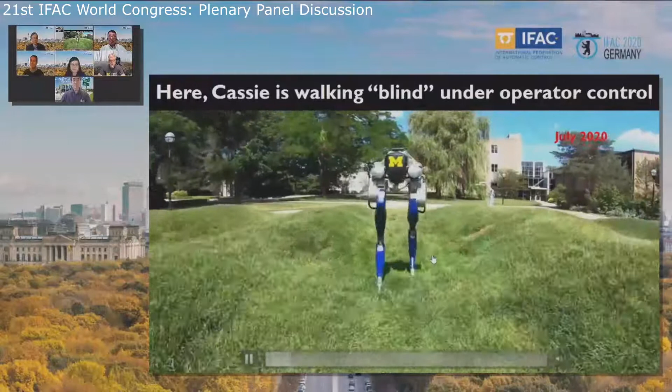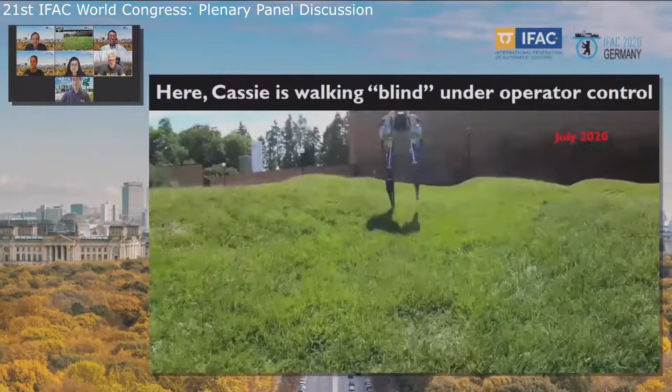So this is a Cassie bipedal robot. You will see here it's under operator control. There is no perception on the robot other than an IMU and encoders. There are no force sensors in the feet or anything like that. This is the wave field at the University of Michigan, right behind the aerospace building.

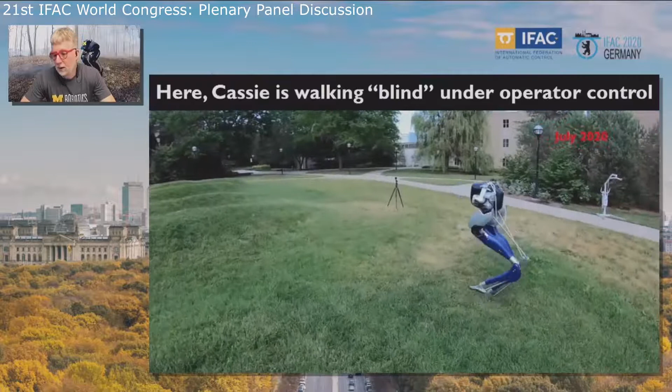It's been a dream of mine to do this, and one of the big painful parts of my life is watching children just run across this thing carefree, and my robots being a total disaster on it until 2 weeks ago. One of my students pulled off this. What I want you to see is some of the things that a robot is capable of doing when it's under operator control, and what we want to be able to do is accomplish this under autonomous operation, and I'll be talking about that next.

But notice here he's approaching it somewhat cautiously. This is the first time through these big humps. We've been up and down the valleys with other robots before, but we've never had a robot able to clear these humps. It's a single gait. The robot is not changing gaits as it moves. What the operator is doing is just controlling the speed that the robot is advancing, direction, but of course all of the real-time balance is being done by the robot.

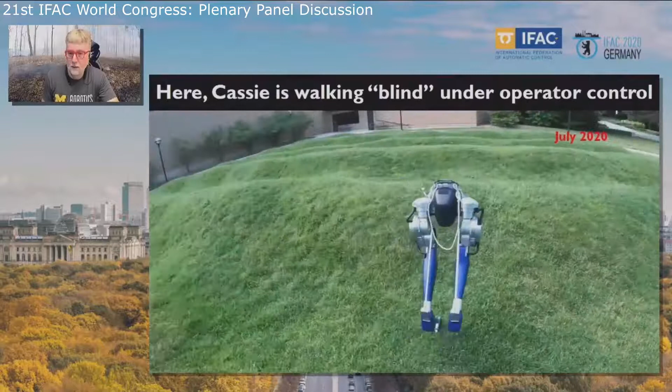So we make it through the humps, and then we get to the very end. And one of the things that my lab is extremely well known for is we're brutally honest with where we are in the state of the art. And well, yes, face plants. That's our state of the art.

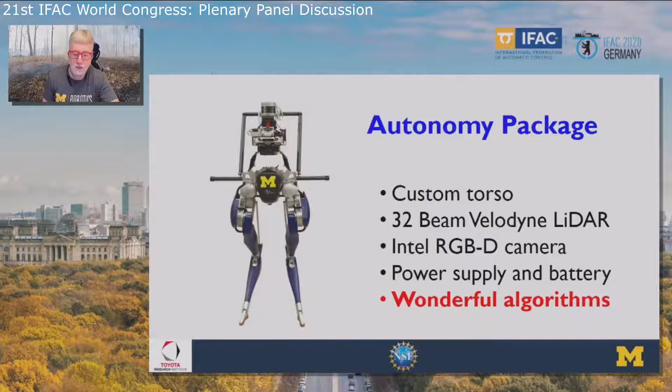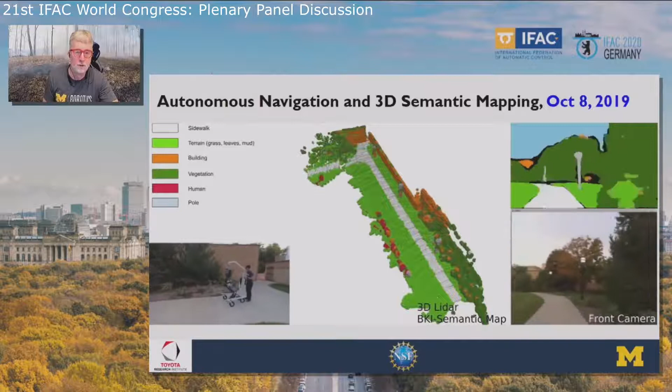So now this is our Cassie robot when we equip it with an autonomy package. So we have an RGBD camera, where D means depth, and a LiDAR. And so this is also on the wave field, but navigating around it on the sidewalk. This was last fall. And what I want to do on the next few slides is just walk you through what's actually going on in terms of building this real-time map that a planner is able to use to develop waypoints that are then sent to the local controller that you saw just performing on the wave field.

So what happens is when the camera image comes in, it is being segmented with a neural network, and then semantic labels applied. So what this means is the robot can reason about the scene because it knows what is a sidewalk, it knows what is grass, it knows what is people, it knows pixels that are assigned sky, building, and grass. The next thing we do is we become extremely proficient at fusing LiDAR and camera data. So what you see here is LiDAR data on the right overlaid on a camera image.

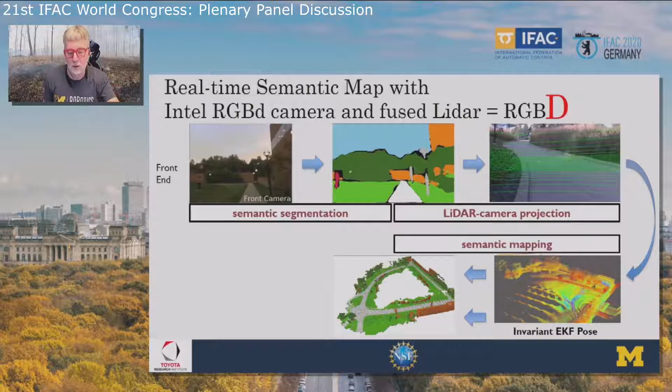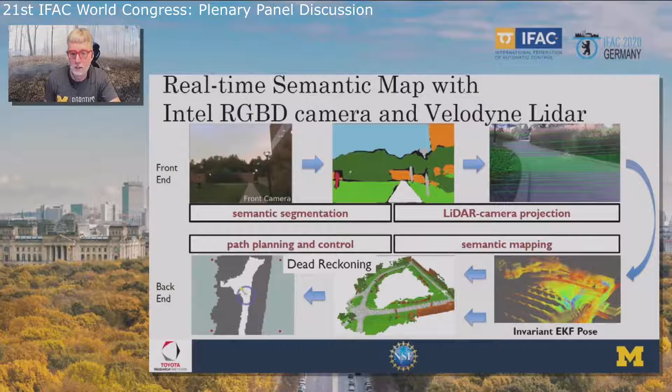And then when you really get this right, and then you take multiple LiDAR frames and fuse them together with an invariant extended Kalman filter, which is processing the IMU data, you get this beautiful map that you see on the lower right. And then that leads to us being able to build in real time the map that you see in the lower middle of the screen. Now that map looks like simultaneous localization and mapping is happening because it looks like a loop closure has been done, but after 120 meters of walking, the robot misses the final target point using dead reckoning by a mere 10 centimeters. That's 1 part in 1,000.

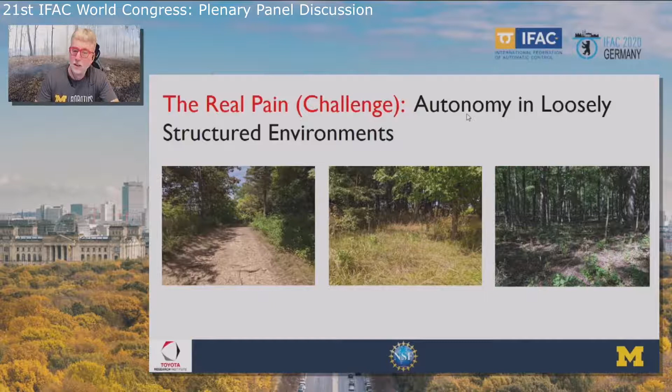Now to accomplish this takes an amazing amount of system integration, which is extremely hard, but my group has built that up. The next joy that we're going to have is when we can do this level of autonomy in much more loosely structured environments where we are heading to the forest. Right now, in terms of Jing Sun's theme, it's painful just thinking about how we're going to accomplish this.

And now, Ilya, take it away. Thank you very much, Jessy.

So it's my pleasure to contribute to this discussion of exploring dynamics of integrated systems by making a few remarks about flexible aircraft. And one of the recent trends in commercial aviation has been towards airplanes with high aspect ratio wings, basically longer wings. Such wings reduce fuel consumption, but they are also more flexible and can experience high deflections and loads as they're exposed to maneuvers and gust disturbances. So for such a flexible aircraft, it is more challenging to ensure that critical loads do not exceed specified limits, which are imposed to guarantee aircraft safety and structural integrity.

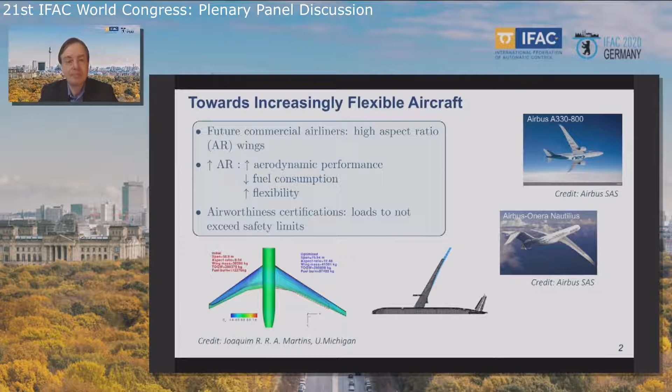At the more extreme end of flexible aircraft are very flexible aircraft, or VFA. They include high-altitude, long-endurance platforms, such as Aurora Odysseus and Airbus Zephyr. These vehicles are solar-powered and can stay up in the air for days to provide observation and communication relay services. As you can tell from these pictures, these aircraft rely on high aspect ratio wings, high lift-to-drag ratio, low structural weight, multiple propulsors, and multiple aerodynamic control surfaces for their mission.

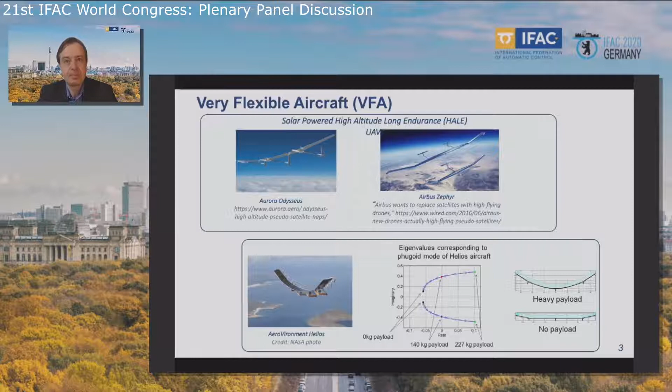So these flexible aircraft are quite challenging to control due to reduced separation between rigid body and flexible modes and possibility of large deformations and nonlinear behavior. Typical physics-based models for such vehicles are high order, between 100 and 1,000 states, and it is not straightforward to directly use them for control. There are multiple control effectors, which can, in extreme wing deflection cases, even change their role. For example, an aileron can start acting as a rudder.

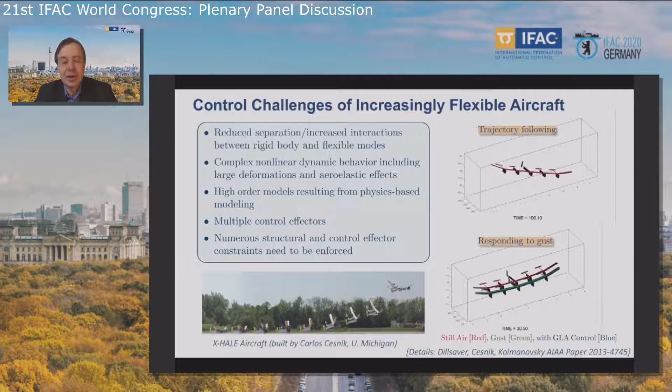There are also numerous structural and control effector constraints which need to be enforced during aircraft maneuvers or when responding to gust disturbances. Some of these challenges are exemplified in an aircraft called X-HALE, which was built by my colleague at the University of Michigan, Professor Carlos Cesnik. If you attempt to pilot such an aircraft remotely, that is largely open loop, you very quickly come to understand the challenges or pain in dealing with its dynamics.

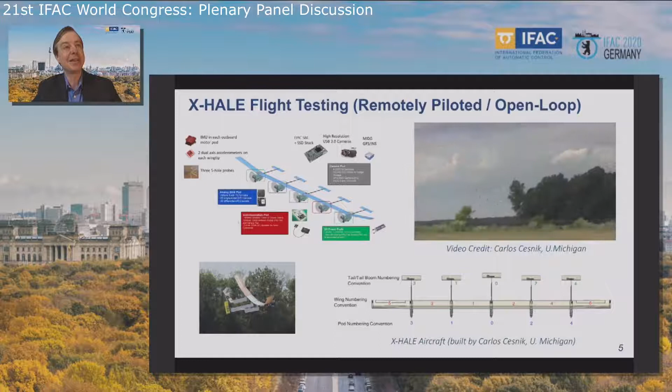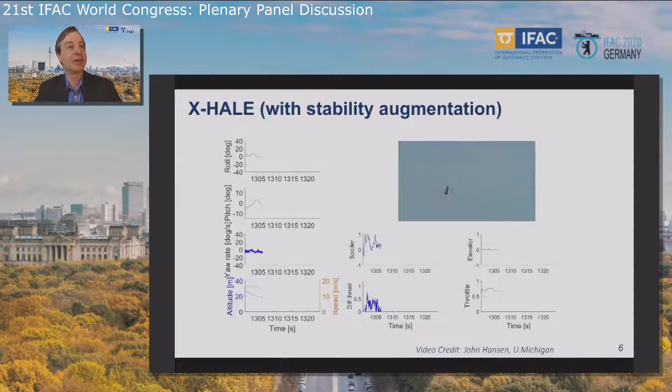This video illustrates some of the early flight tests and shows some of the interesting dynamics of this aircraft, as hopefully you can see from this video. And ultimately, an attempt to control these dynamics is unsuccessful, ending in a crash landing that we will hopefully see here on the video shortly. So you can have a lot of fun trying to control such an aircraft. Of course, the results can be improved with some level of control on board, and this video shows a more controlled flight and successful landing of such an aircraft.

Carlos and I have been collaborating on trajectory following, maneuver load alleviation, and gust load alleviation problems for such and similar aircraft. In fact, in our current work with Carlos, our PhD student Matias Pereira, and Dr. Fabio Vetrano from Airbus, we've been developing a maneuver load alleviation system for flexible aircraft, which we call MLA Governor. This MLA Governor is based on model predictive control, and its advantage is it can respond to predicted load constraint violations at multiple points on the aircraft, rather than react to already occurred threshold violations as existing MLA schemes do.

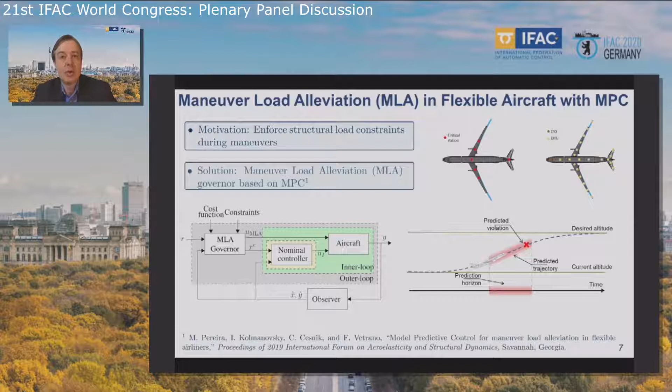The way MLA Governor alleviates loads is by modifying reference commands, such as the flight path angle that you feed to the nominal flight controller, and by directly modifying operation of the control surfaces dedicated to MLA, such as outer ailerons. And with this, it's my pleasure to invite Professor Kira Barton to continue the discussion.

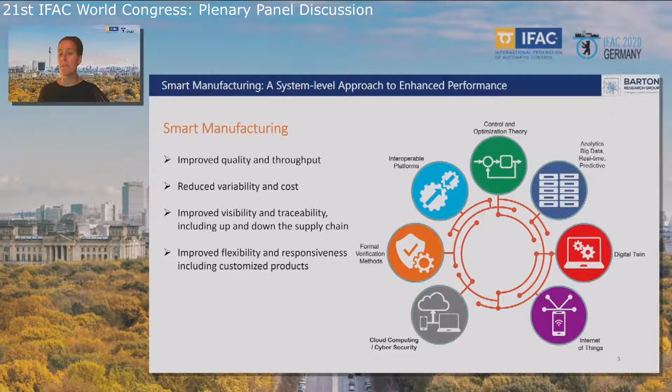But what I would like to talk to you a little bit about today, very briefly, is the area of manufacturing. And in my group, what we focus on is really modeling and control in manufacturing and robotics. And particularly, we've been looking into the ideas of smart manufacturing and how to think about using a variety of different technologies and capabilities so that we can try to improve performance and think about being more agile and responsive. And this is particularly true as we can see examples in the most recent several months where the ability to respond and adapt to changes and modifications is extremely important.

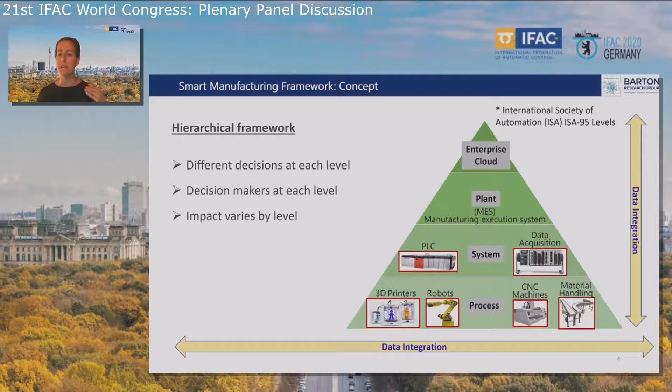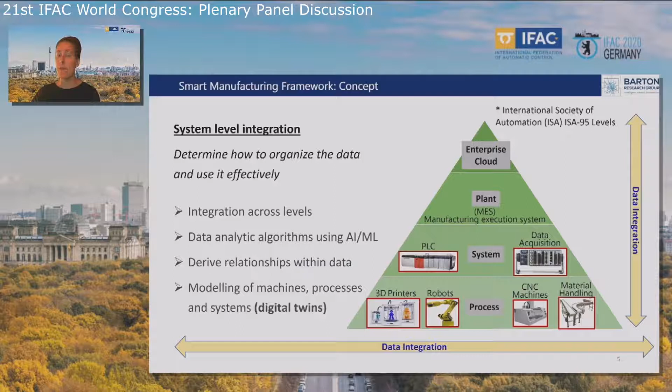Now with manufacturing, manufacturing is naturally a very hierarchical system. And so we have dynamics and interactions and really decisions that have to be made at every level. And so one of the big challenges that we see is how do we effectively transfer information and understand the interactions across these different levels. We look at this as a system level type of problem or challenge really, where what we want to do is to be able to effectively take decisions and information and knowledge, and we want to integrate it across the different levels. And when we start to do that, we have lots of different system integration things that we need to think about, and we have interactions that we need to consider from multiple different planes.

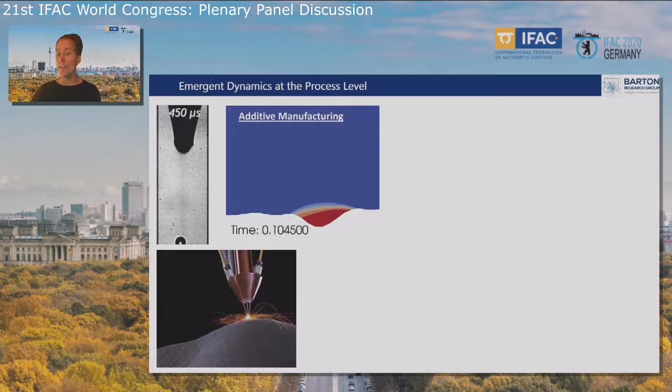So let's consider from the process standpoint, there are interesting dynamics that we can share just really from a process side. So if you look at an example like additive manufacturing, this is a really nice emergent area that has lots of different dynamics that come into play, particularly when you start to look at the interactions that you have between the surfaces perhaps that you're printing onto and the interactions of that material base with the new materials that you're putting down. Now you couple something like that with the other aspects of what's happening at the process level, and you can start to see other kinds of interactions. For example, on the robotics side, perhaps the material handling.

Now, classically, you would see pick and place type of more static interactions where you can start to learn these behaviors and have a very controlled environment. But what we're starting to see is this transition away from that very static, very sort of predetermined set of conditions towards a much more interactive and flexible system where you now want to look at the interactions between a robot and a human, and you want to have these collaborations going on throughout the entire system.

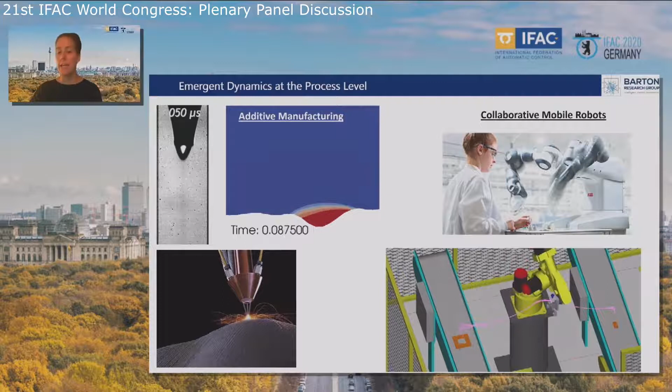And so now that's just two examples at the process level, but what's really interesting is that what we know from a system perspective is that throughout the whole enterprise, really, you have behaviors and interactions that come into play. And so things that happen upstream are going to have an impact downstream. And so being able to model these interactions and understand the impact of them, and then start to do things like predict when you're going to see anomalous behavior or how that behavior might propagate through the system, that becomes a really interesting opportunity to start thinking about these interactions and how to model them.

And of course, ultimately what you want to be able to do is to make decisions. Much like we saw in Professor Sun's talk, these are variable time scales. Depending on what your objective is, you need to be able to do things in microseconds to milliseconds to seconds to even hours. And so you have all this variability and these interactions. And of course, a good example that we've seen in the last couple of months is how do we make this more flexible and agile so that we can respond to fairly significant changes that might be going on and yet be able to do it in an agile and effective way.

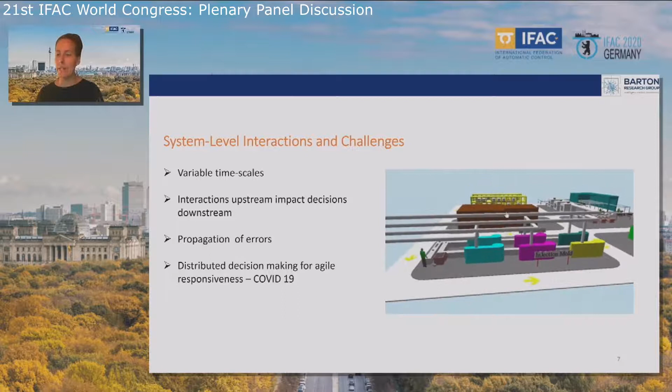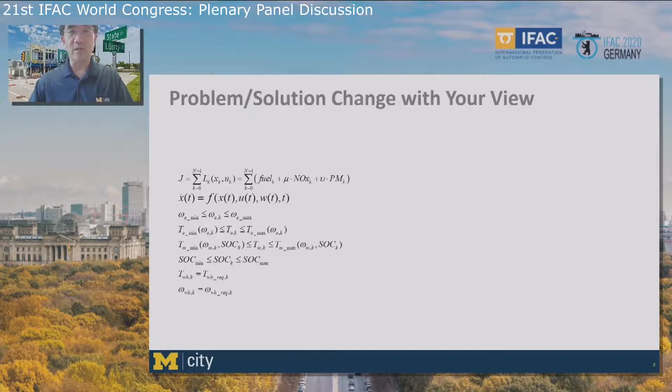So many of our control guys work on your favorite optimal control optimization problems. These are just equations you don't need to pay much attention to, but this is from a hybrid vehicle research I worked on with Professor Jessy Grizzle many years ago. And mostly for the so-called pain and joy, I would say most of the time it's joy. We really learn something new when you make two changes to your favorite optimization problem.

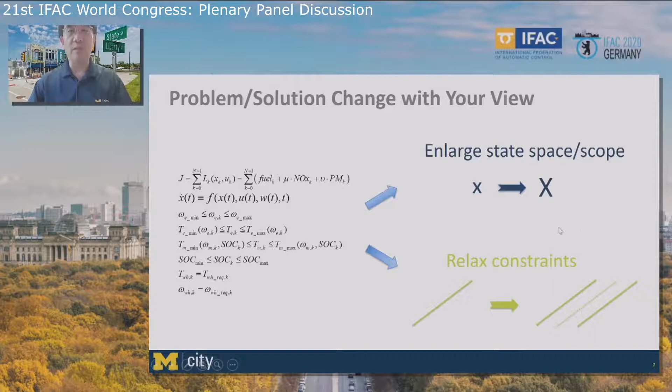One is if you look at a larger state space, or you relax your constraint. So many of the times we look at the equality constraint and inequality constraint as if there's nothing you can do with those. But in many real applications, you actually can relax the constraints. So I'll give you two examples of when you enlarge your scope, you look at different problems, the findings are totally different. So the first example I give is an eco-routing problem.

Eco-routing is opposed to fastest or shortest routing, which your typical Google Maps and so forth will give you. With eco-routing, you want to minimize energy consumption. So what we did over the last few years is first we collected data from many trips, and then we built an energy consumption model for the city of Ann Arbor. And then we actually solve the eco-routing problem. This is real-time; we can calculate everything very, very quickly. We divide the city into many origin destinations, and by clicking the origin and destination, it will solve the eco-routing, fastest routing, and so forth problems.

So all good. And the major finding from the solution is that when compared to fastest routing, on average you can save about 13% energy if the trip is long enough. Longer trip, you save more. But in comparison to the fastest routing, you also pay a price in terms of more time. Everything here is done by traffic simulation software, not by a simple MATLAB type of computation. So this is a typical eco-routing solution, and obviously nothing here is surprising.

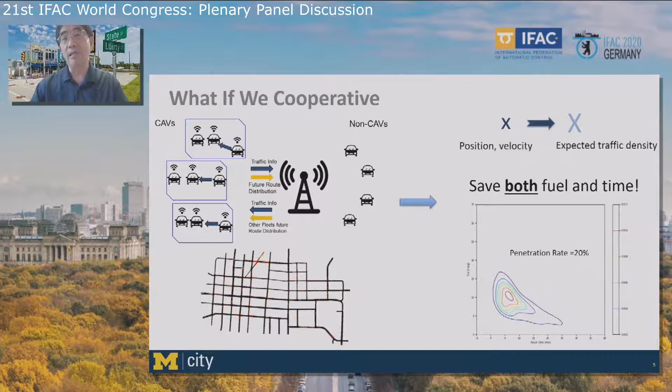However, when we enlarge our scope, and basically say going forward there will be connected and automated vehicles coming, what if you share your intent for routing choice, not necessarily your position and velocity, just telling a central location what your intent for routing is, then you go ahead and solve the problem again. It turns out that you are able to save both fuel and time. The main reason is that in urban congested areas, the capacity is very limited, and if there is some cooperation, you are able to avoid congestion, which is the main reason you can save both fuel and time. Another problem about relaxing constraints is a pulse and glide example.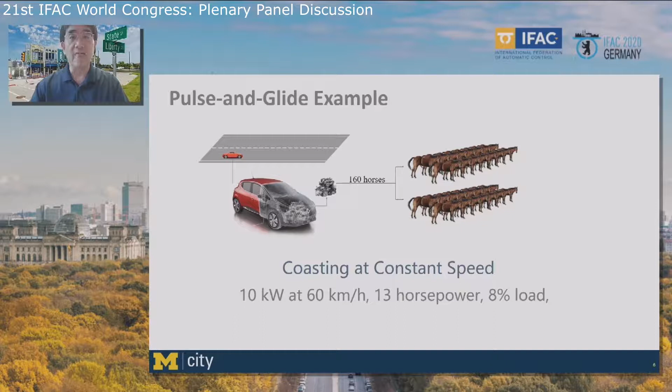We all know that modern vehicles have many horsepower, and when you are coasting on the highway, typically you are only using a small number of the horses you have. So this enables a phenomenon called pulse and glide.

As you can see, we use the concaveness of the powertrain generation, and we are able to oscillate between the idling point A and the tangent point T. And if you oscillate between these 2 points, your average fuel consumption is lower than that of point C, which means you are saving fuel.

So the concept was basically resulting in more or less you are following the vehicle in front of you, but you are relaxing the constraint. You don't need to follow it precisely. If you pulse and glide a little bit, you can save a lot of fuel. More recently, some Hitachi researchers picked up our idea and implemented their testing in Japan, and they were able to find 8 to 38% fuel consumption reduction.

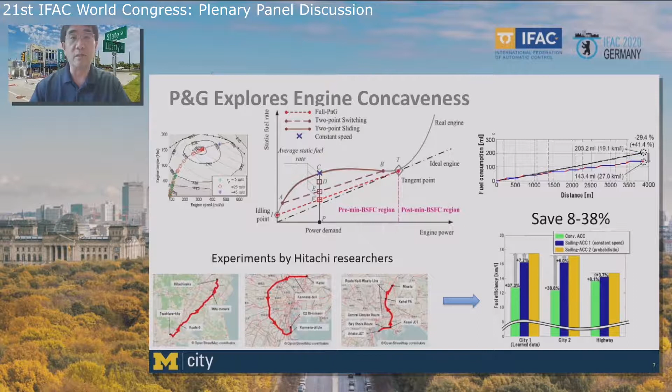So in conclusion, again, it's mostly joy. If you enlarge your scope or you relax your constraints, you can find very surprising results. And that's really very fun that my group has been doing over the last few years.

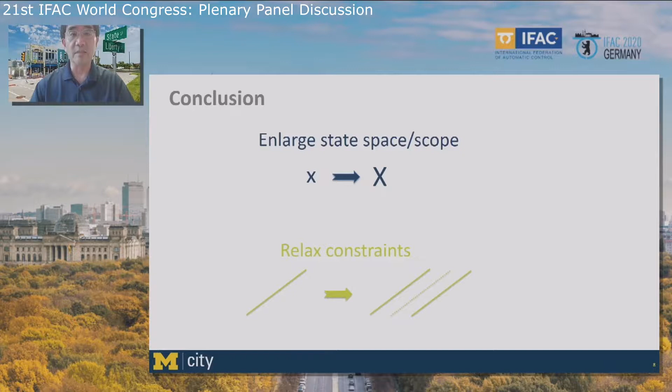Well, thank you all, the panelists, for the very interesting discussion. And I was hoping that I take all the joy and leave the pain for my colleague to deal with. But as you can see, they are all accomplished researchers, and I see them as super integrators, not just numerical integrators. As you can see, they show different flavors of system integration and system dynamic aspects. So we have about a few minutes left.

I would like to throw just one last question to the panelists, including the chair of the session. What do you see as the biggest challenge, or the pain, or the most rewarding part of integration and exploring the dynamics? So can I start with Professor Asama?